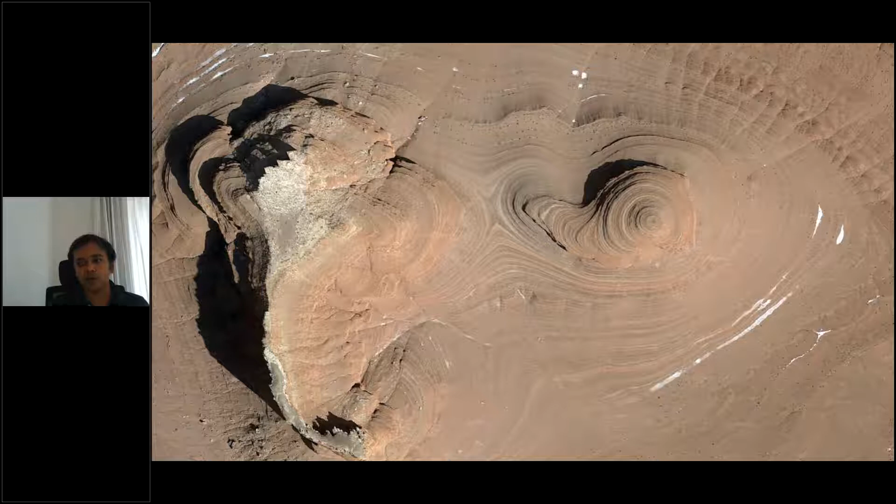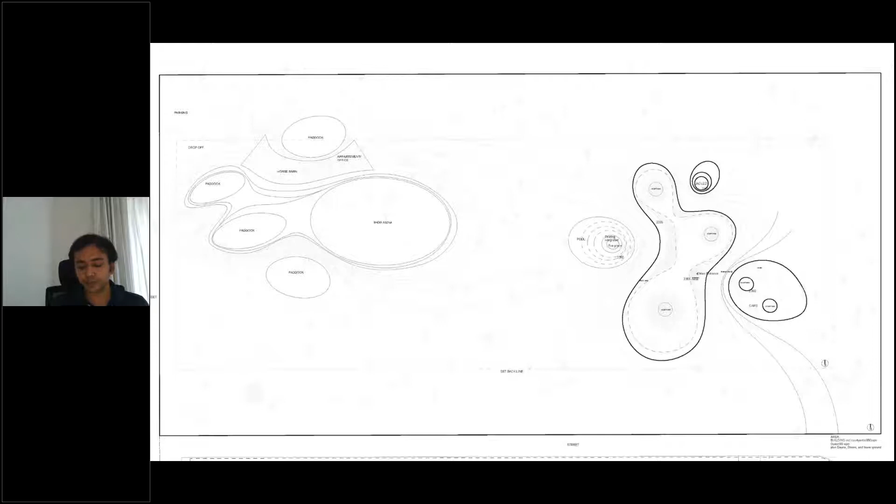So what we did was we took this 5-acre site where the client requirement was only 600 square meters of area, which is on the right, and on the left, it's a show arena for horses.

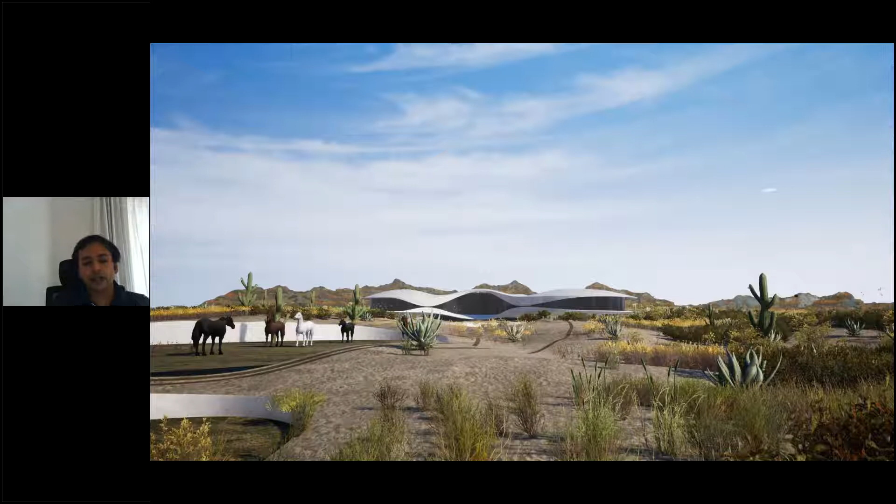In this case, the evening sun comes in, the winter sun comes in, but the peak summer sun is cut by the form and the facade. So when we speak about integration of facade systems with the surroundings, here the built form sits in symbiosis with the surrounding, and it also opens and closes. This is done for structural purposes, and also it closes up at times to create spaces which require more privacy.

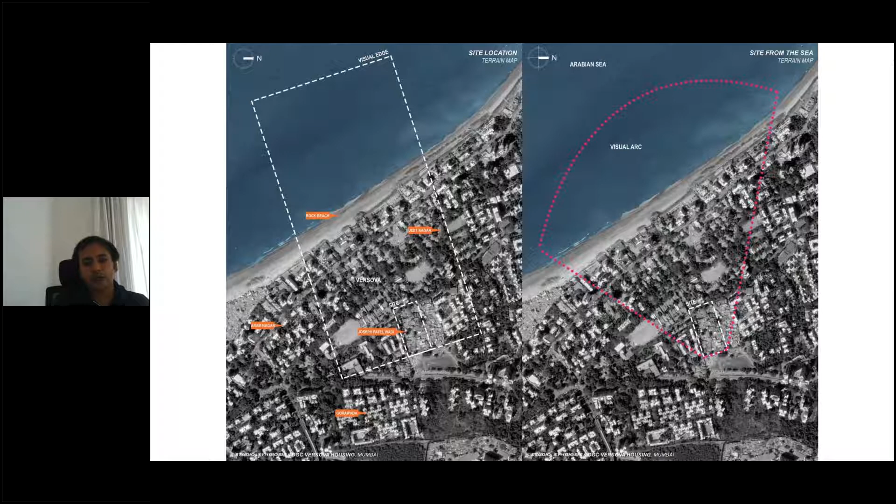The second project is a tower housing project we are doing in Versova. Here the site itself is 4 acres. The beautiful thing about the site is the view which we are getting from it.

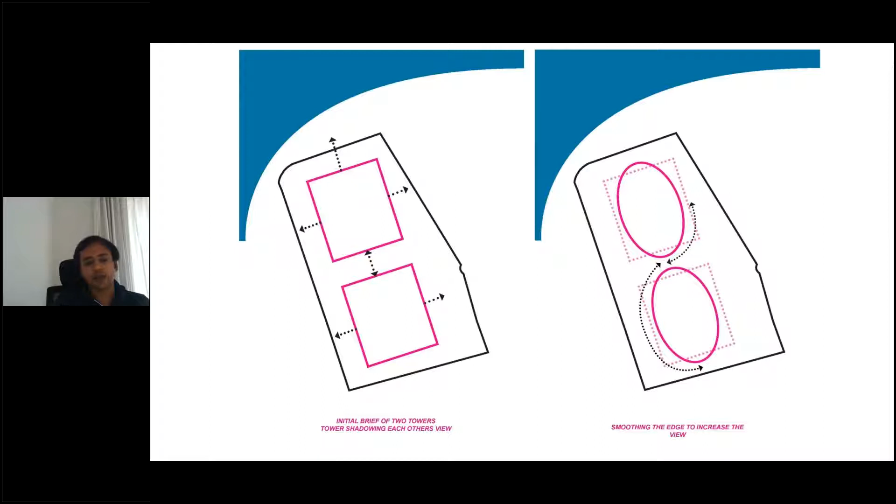The client brief was very interesting. He wanted 2 different towers on the site, which created a bit of an issue for us because the second tower was actually hiding the first one. So what we started doing was creating this elliptical form, and by rotating it, we did a lot of iterations of how we can get maximum view and full view from each apartment in the tower.

This evolution diagram shows how we start doing it. Of course, the lower 5 floors are the podium for the parking, and on the upper floors, we start creating this dancing tower.

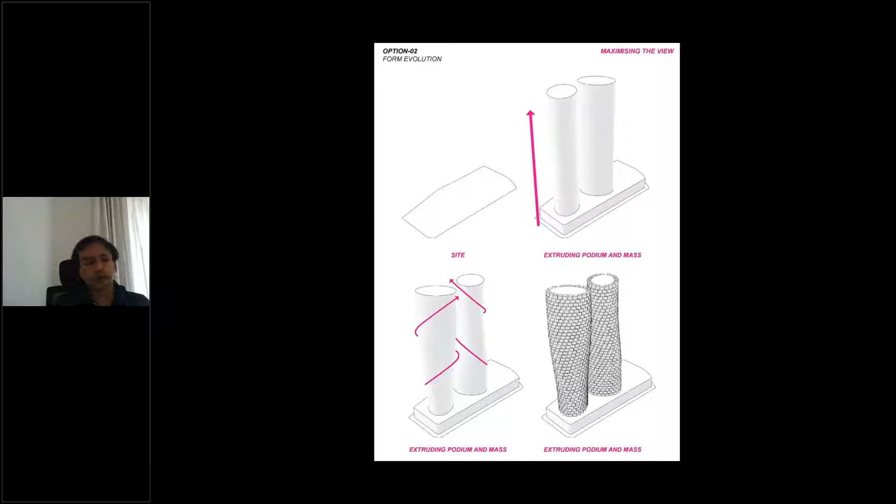In reality, what happens is the facade opens up towards the water. So what you see in this image is all glass, and then it starts closing up. If I showed you the other side view, this would be completely closed, where the core is also sitting. By using this system, we could create a design whereby the facade is completely open towards the view we need, and it starts closing on the other side.

It also gives us apartment-to-apartment privacy, but also from within the apartment we have very nice views of the water. So again, in this case, the design is a direct response to the immediate surrounding in terms of the views we're getting from the apartment and from the tower.

Although you can say the facade itself is not very extravagant, the form and the function actually come together to create this design, whereby the entire thing comes together as one, and you cannot really distinguish which part of the built form is facade, which is architecture, and which is structure.

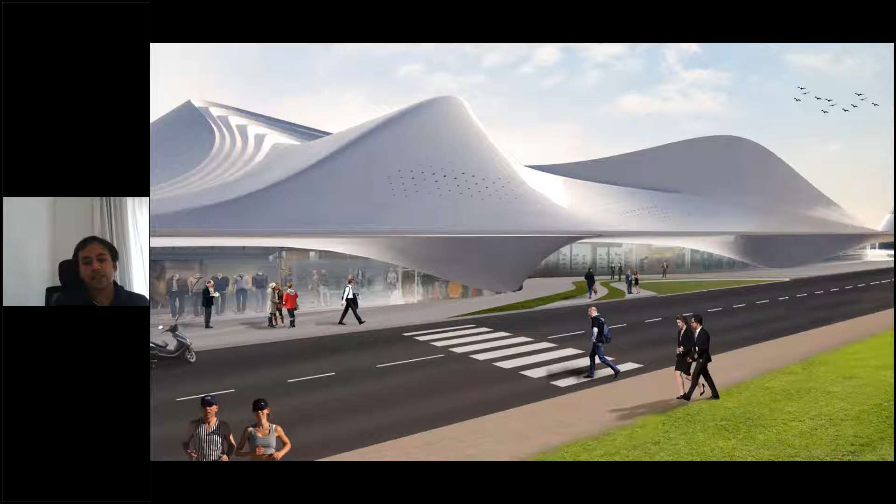This is a very interesting project for us. It's an 18-acre riverfront development in Pune. The client brief was to create a very iconic undulating surface for a shopping experience and commercial experience.

The entire site actually falls in the high flood line, this front part of it. The idea for us was to take this erosion principle from nature, because the site itself is eroded over years, it's flooded every year, and the water recedes back. Looking at these erosion principles from nature, we started looking at this undulating form.

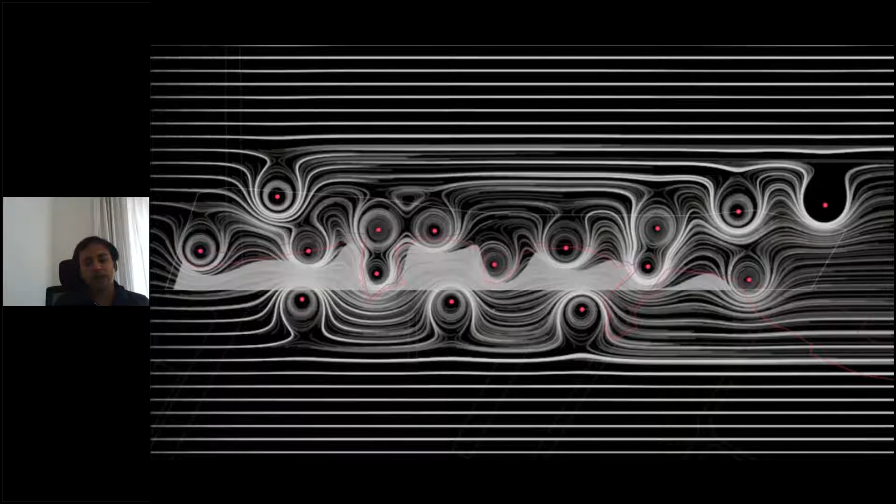To start the design itself, we first plotted the high flood line and the low flood line on the site, and then attractor points were plotted on the site to create this undulating grid. This erosion principle actually guides the entire design, the build and the landscape, and also the facade system.

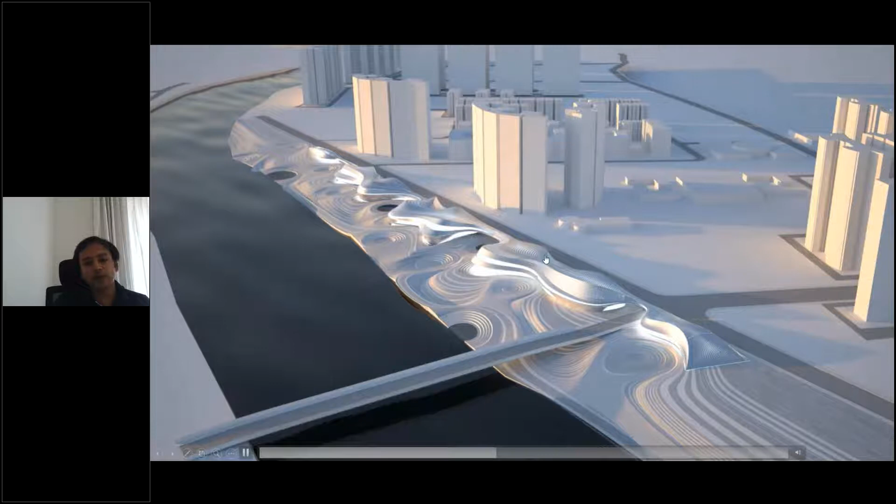For us, the play of light and shadow is very critical in design. By doing these undulating surfaces, we were getting very nice shadow conditions. And of course, the facade opens up.

Being a shopping mall, we could really sculpt the building a lot. We could create closed spaces on the lower floor, where not a lot of light condition was required in certain areas. So we really saw it as a sculpted form, whereby we can create these perforations on the upper floors and close the form on the lower area.

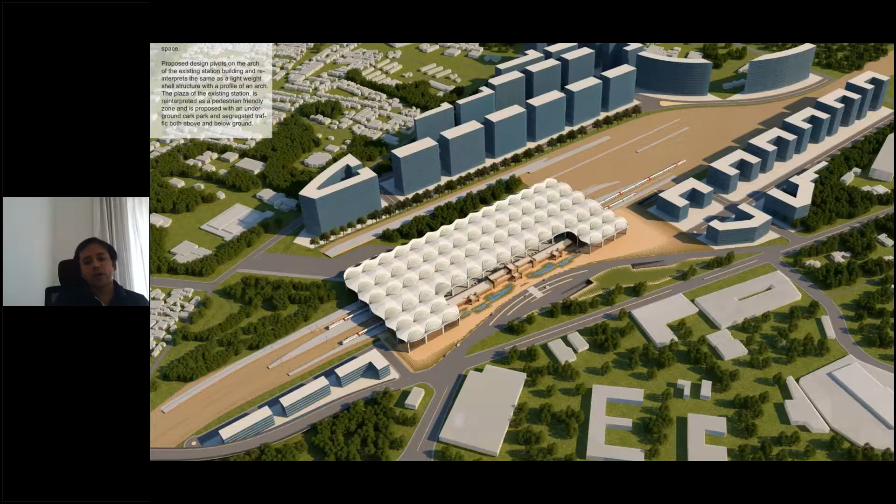Now coming on to the next one, this is a central train station for Gwalior. About 1.5 years ago, we won two international design competitions for Gwalior train station and Baiyappanahalli train station. For us it was very interesting when we started the design, because in a design competition at times you can get trapped thinking about what the jury is thinking.

But we thought, let's do what we think is the best and just forget about everything else. So for us it was not just creating a space or architecture, it was creating social space. The site is located central to the historic city and the new city, and for us it was really connecting the two and creating a social space in the center where the entire city comes together.

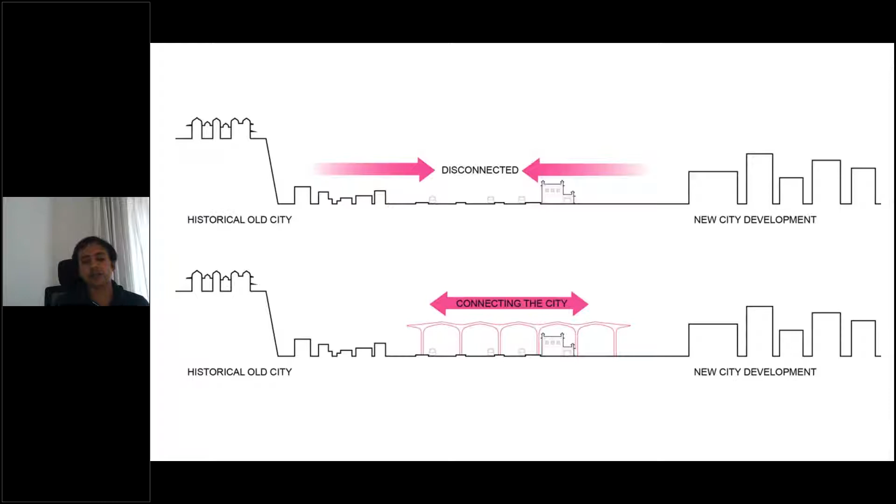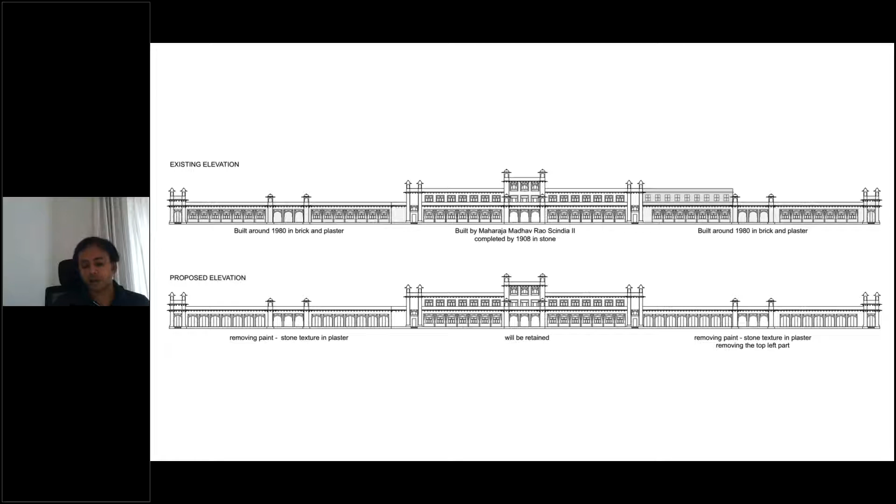In terms of the design evolution, the heart of the project is this existing train station. Although it's not a listed building by UNESCO, it's a heritage building. So for us the idea was to retain the existing building and weave our design along with it. These are the existing arches on the built form, and an arch actually is a very good system of structure. It's not just about architecture, but also about structure for us in a train station.

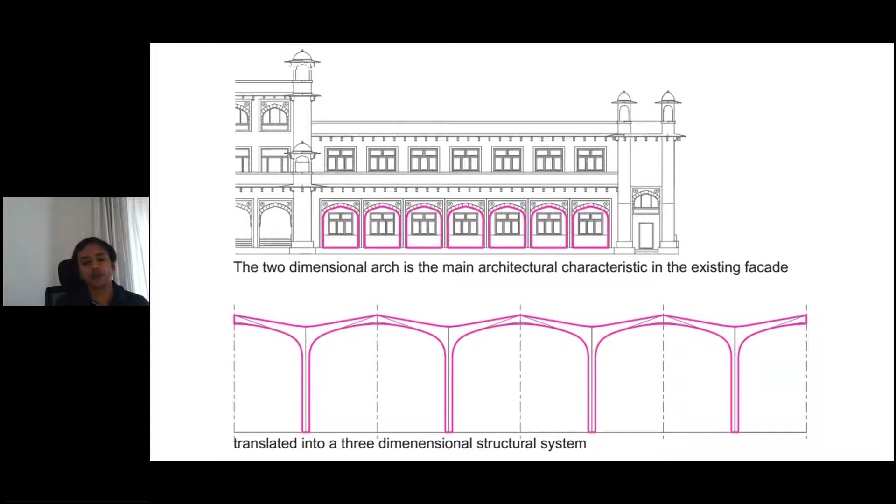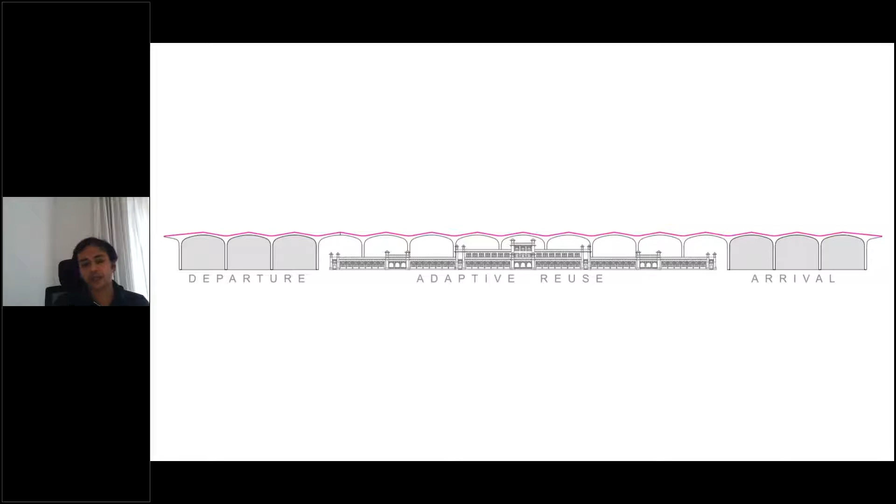So we extrapolated these arches and transformed this into a 3D model. In a train station, the scale is very important because the platform sizing at times needs a 32-meter spacing column to column. By doing this domical structure, it gave us the possibility of creating a system whereby the roof itself becomes a module, incorporating the columns also. This one module is repeated based on the allowed spacing.

This train station is an existing train station, so the platforms are predefined, and we could not even reduce the platform sizes. The largest span we're getting is 32 meters. So in this case, if you ask me which part is facade and which is architecture, it's very difficult. It's one comprehensive system whereby the form, function, structure, facade, and services all integrate in one.

Also, although we have given huge glass panels at the entrances, we also have deep cantilevers, and high performance glass is proposed here. The idea is that when a person is coming, it gives a very nice welcoming gesture to the visitor.

Some people say that glass is bad. Glass is bad if you use it not in the right way and you don't think about how you're using it. As long as you are systematic and conscious in terms of how you use it, and you do solar simulation, this can actually give you a very good opportunity in terms of openness of the design.

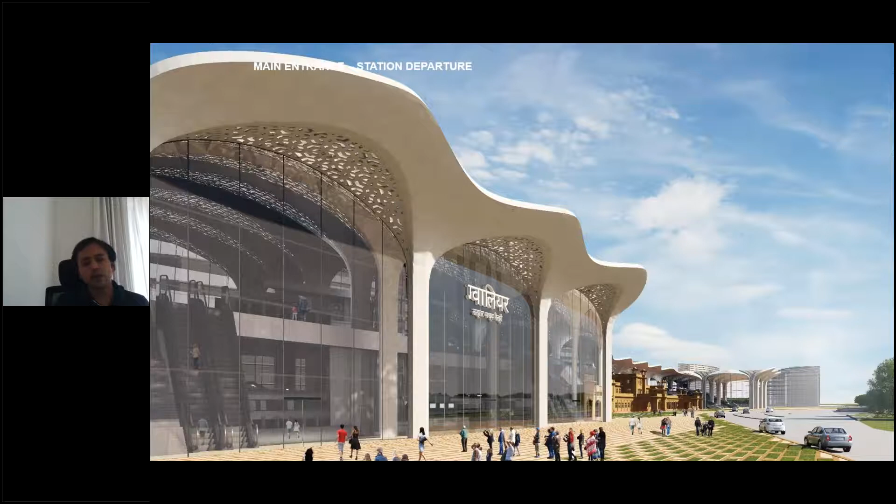In terms of the roof, we also tried to play with a pattern of light and shadow. It's something which is very easy to animate because the sun is moving throughout the day, so the shadow patterns on the floor will also animate.

Different systems are used inside and outside. Outside we're using GRC, and inside we're using FRP and GRG. The reason being that we are looking at a watertight facade, and also the loading of the facade and the costing. So all these three things, we try to create a balance in terms of how we create the system itself.

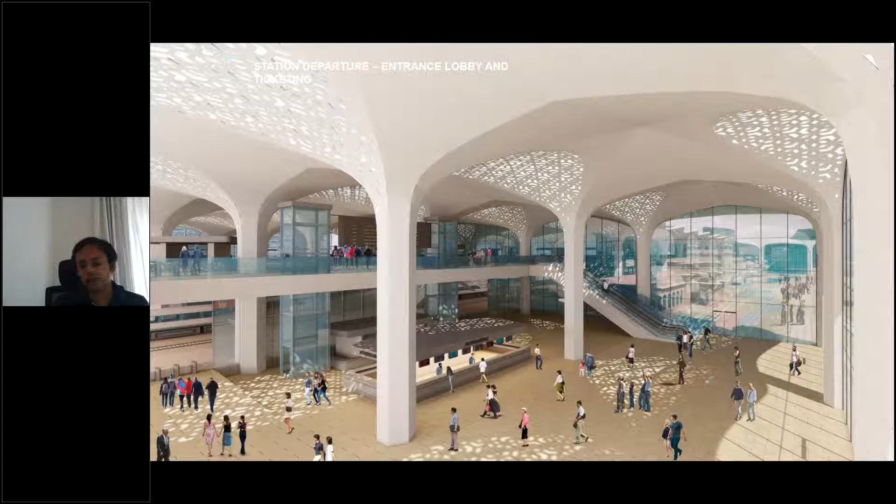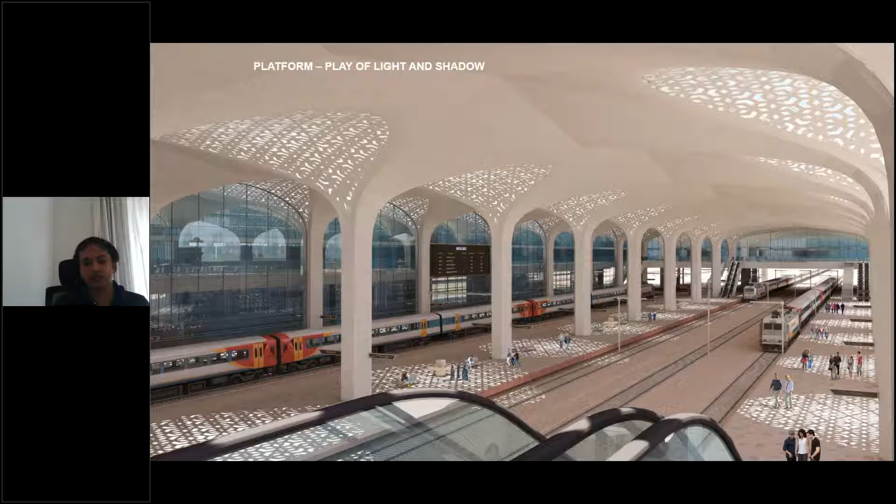Now the second topic of this particular presentation is how facade can be integrated with design itself.

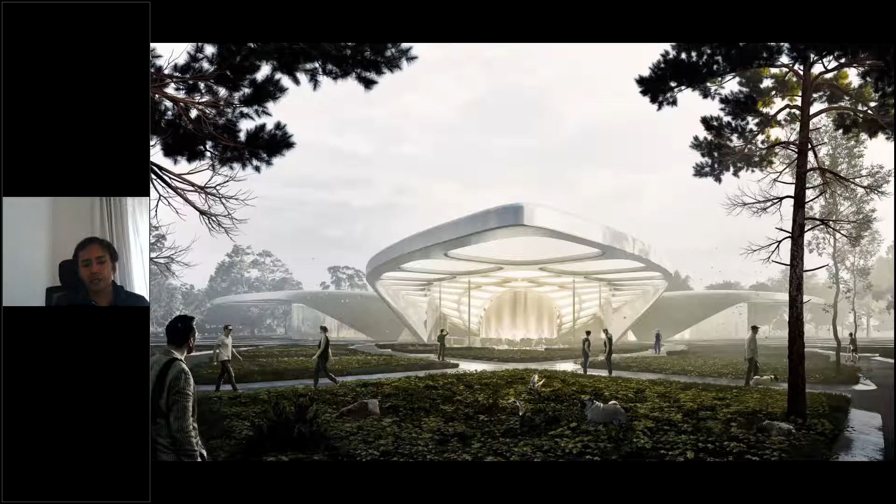So this project is Perfume Park and Museum, an 80-acre project in Kannauj. The design brief is based on the fact that Kannauj and Grasse in France have a Twin City agreement to create a skill development center in Kannauj, whereby there will be a distillery and they'll be showcasing the existing attar of Kannauj in the museum at the heart of the complex.

So for us, if it's a perfume park and museum, we did not want to go very literal and create another lotus temple. We started looking very closely in terms of what it means to be a flower. So the center of a flower, in this case a sunflower, it actually radiates out, and the base system is a Fibonacci series. So it is based on golden ratio and it's an exponentially growing grid. So this grid was analyzed and developed.

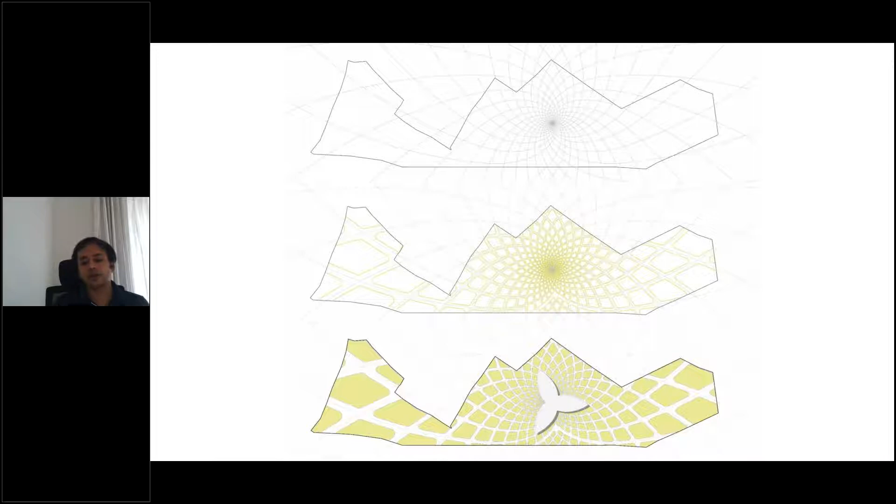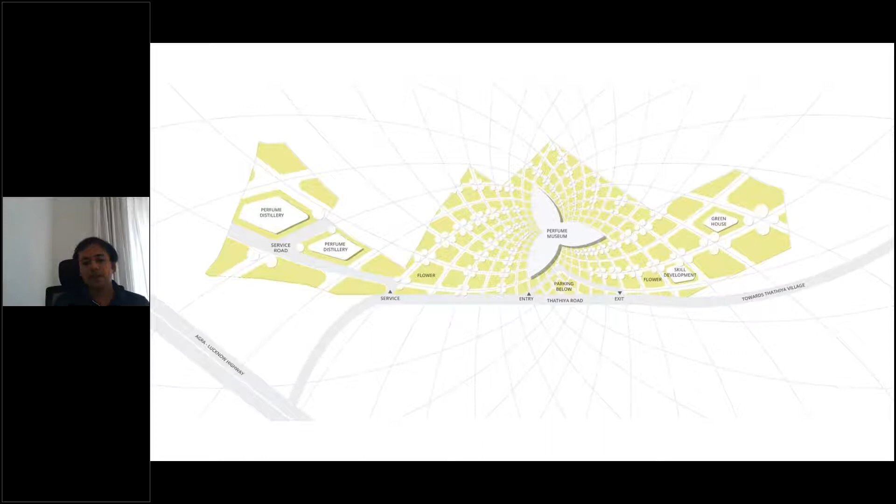In terms of unifying the facade system with the design, the reason I want to show this project is that the entire thing comes from this one base pattern. This base pattern actually evolves and creates the facade of the system, whereby in this view, the 3 petals which are there come from the base pattern itself, the pattern of a flower. And these 3 petals have 3 distinct functions within.

If you ask me which part is facade and which is function, we have again used deep cantilevers with glass to give us more visibility. It's a low height structure, and of course the scale of a project matters a lot. If we were to design something which is 120 meters, how we treat the facade would be different. But in something which is only ground floor, we can be a bit more experimental and create something more extravagant.

So the pattern of the landscape is projected on the ceiling, which in the outdoor area also creates the lighting system that actually accentuates the inside. So this is how the building sits in terms of the surroundings.

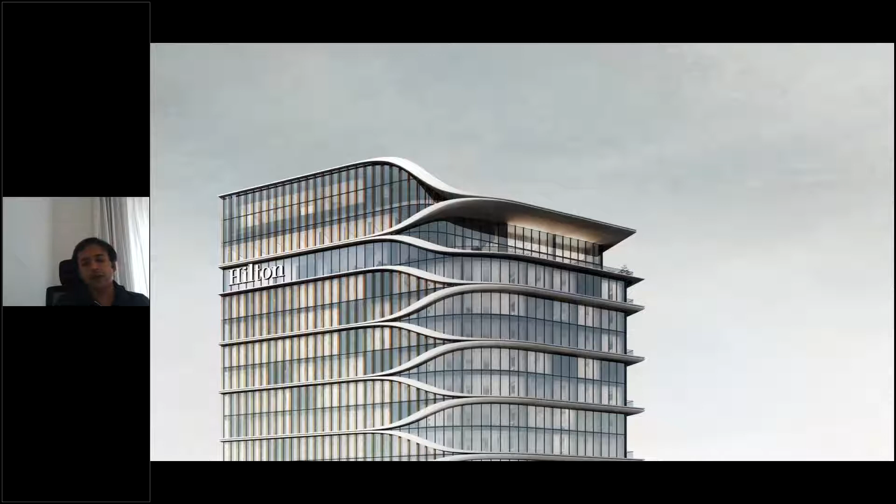So this one was the most difficult project for us. The project is Hilton Kathmandu, in terms of symbiosis with design and in terms of a facade system. We all know hospitality is all about how we can make systems efficient. We cannot do something which is non-standard, and we cannot do something which will be very difficult to execute.

Now the design brief was to create a system where we take something from local culture, the culture of Kathmandu. This created a very big problem for us as a practice, because we are usually into contemporary architecture and we're always trying to investigate new systems. So using wood or old carvings was not something we were really interested in. For us, it's very important that we are excited about the project going forward.

So the end solution was actually the prayer flags of Kathmandu. Instead of looking at the architecture of Kathmandu, we started looking at the prayer flag. It's one element which is in the entire surroundings of the city. It's there, but it's not there. So we use this very colorful flag, which creates a sense of aura in the space it's in, and we transform them into this vertical dichroic panel on the facade, which actually creates this sense of prayer flags of Kathmandu into the architecture.

So the building is opened up on the right side to the views of the city, and on the left, these magenta panels are the dichroic panels. So by doing this, we create dichotomy. We are not really wrapping this all around. We also want to have views opening up.

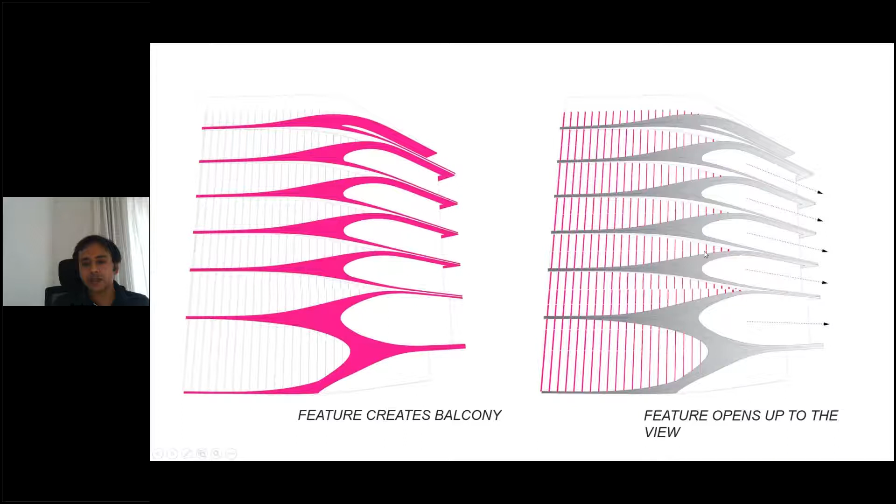And the facade actually becomes these balconies, on every alternate floor. On the left side, it stops the pattern from running around the entire building. So in a way, we try to create this dichotomy, and also when you're moving around the facade, it creates different perspectives. From the left side, you'll see something else, and from the right side, you will see something else.

On the upper floors, we push the system back. The entire thing is single curved glass, so optimizations were done, and we have a glass wastage of only 2.5% right now in the entire building. The bands themselves are made of GRC, whereby the mullions are actually being reinforced. The biggest problem for us with GRC is the weight, but the plus point is that it's a very long-lasting material. So instead of puncturing the slab and going through the spandrel panel, we created a system whereby we strengthen the mullion and can have GRC directly there.

The next one is really where the facade takes a bit of a backdrop and the nature takes the foreground. So the green part of the entire design is actually what creates the facade system.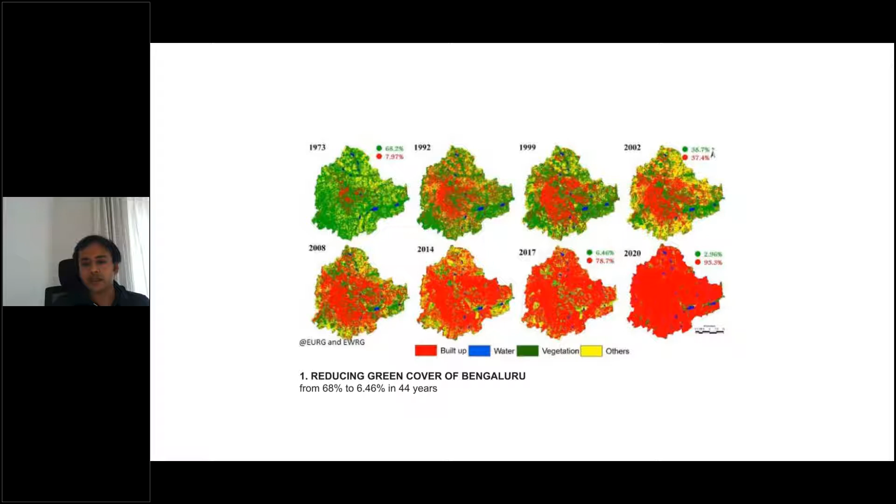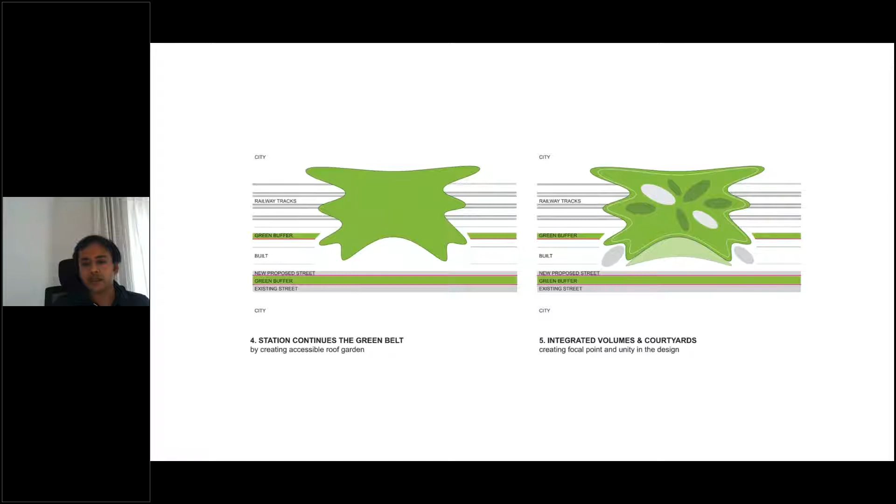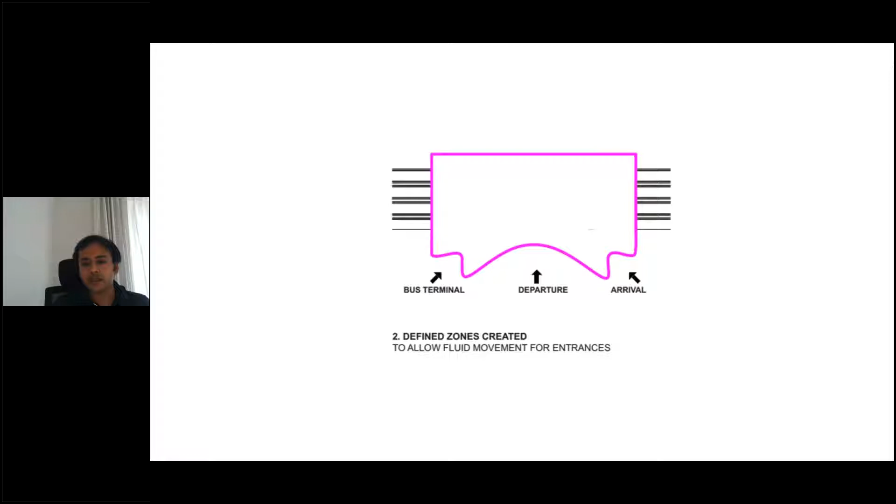So we use this garden city concept and unroll it, creating a system of design whereby all the elements are flowing, creating maximum surface area on the facade. In a station building, it's very important to create multiple entry points, otherwise it's very difficult to control how people are coming in and going out.

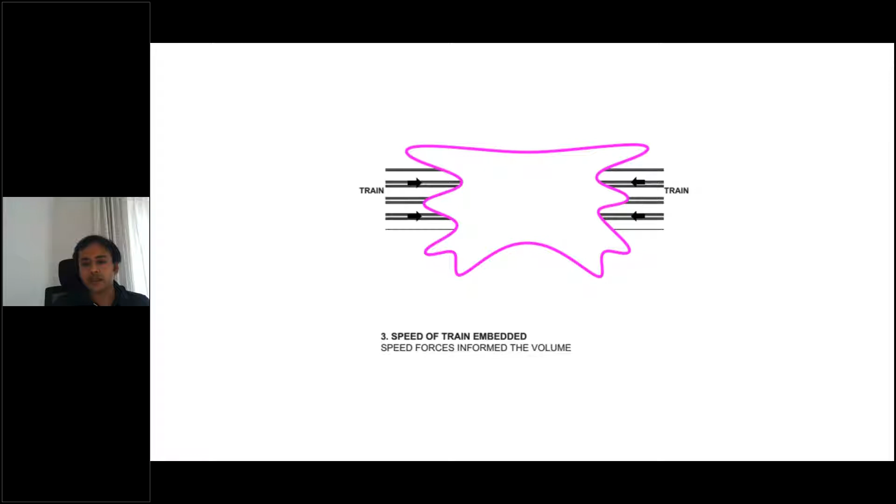Furthermore, the form responded to the trains which are coming on either side, giving us this form. Since Bangalore has a depleting green cover, we transform the architecture and the facade of the space into this green facade.

The roofscape - thankfully in Bangalore the temperature is very ambient, so we can use outdoor spaces as a chill-out space for people moving around. There's also a long halt in terms of a train station, so people waiting for trains can come to the roof and use it as a chill-out space.

Furthermore, these iconic buildings placed around the station serve two purposes. One is to expand the station so we get more areas for it, but they also act as iconic buildings from a distance - a visual marker. The station itself is low height, but these buildings give a visual marker when someone is traveling.

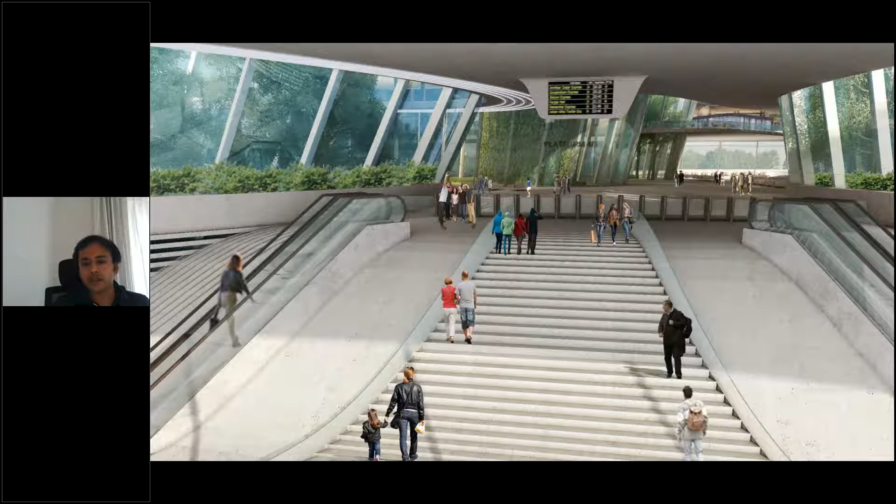These are just some views where the facade actually extends in. The courtyards are punctured in the form, and this entire garden city concept of the surroundings is brought inside the building itself.

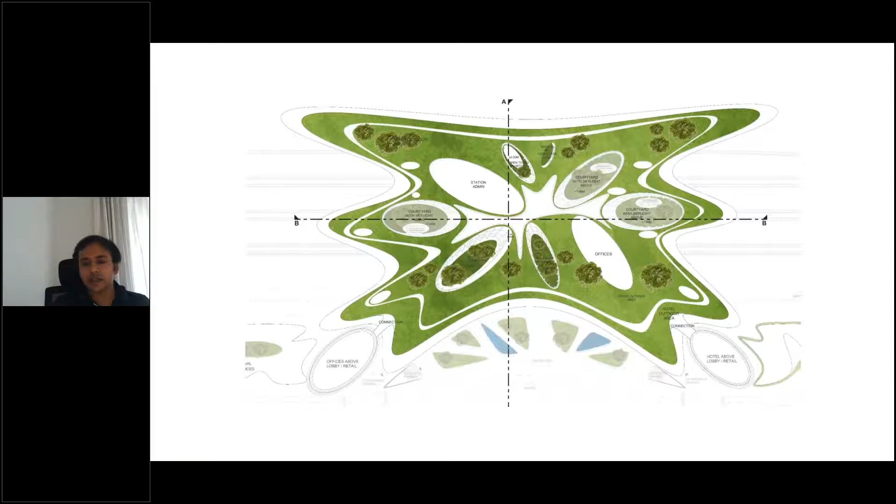Of course, structure is very critical in every case in a project like this, because you have to make sure that wherever there's movement happening, you're not obstructing the movement.

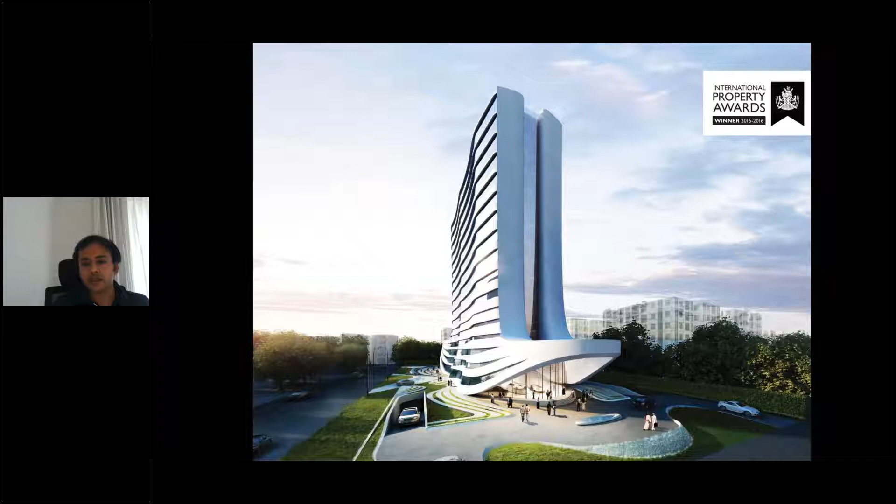This is a project which we finished last December. It has been operational for 1.5 years - it's DoubleTree Hilton Ahmedabad. Here the idea for us was to create a building which becomes a welcoming gesture for the visitor, and also the landscape and the built form integrate with each other.

So in terms of design, the entire form facade system comes together where the landscape ripples onto the facade and creates this built form.

Now, iterative design. In terms of iterative design, we have all these computational tools and techniques which are available to us, and for us it's very important to use this in design.

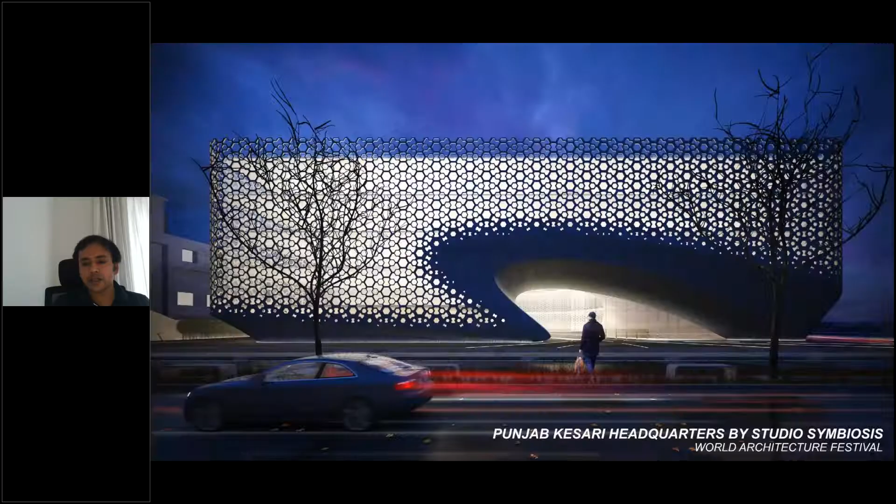This is an older project from the office - I think 6 years old. But it's still very important for us because this was the first project where we started using tools to reduce solar heat gain. Through simulation systems, we reduced the heat gain of the building by 42%, where all the efficiency ratios were checked and an iterative loop was generated.

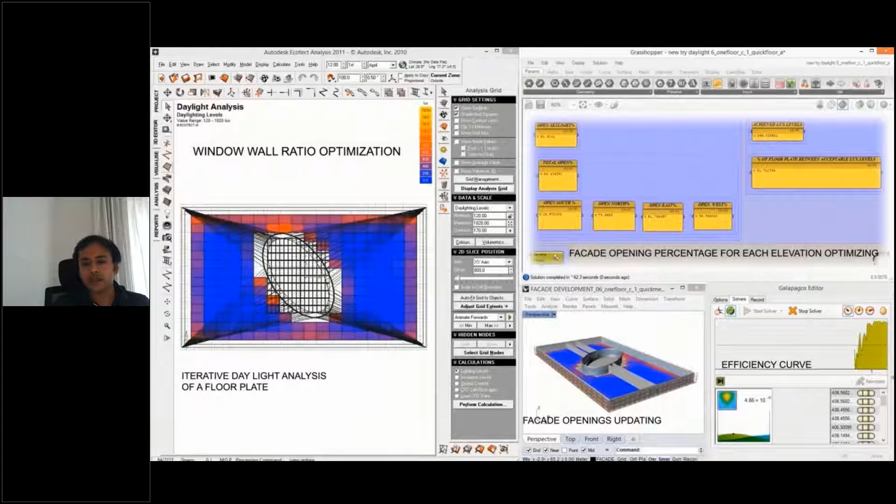I don't know if you can see, but the opening ratios of all 4 facades are being calculated in real time, which gave us the actual ratio we should follow to create this optimized and robust design.

Going forward, we tried to use patterns of India. We did not want to create something alien to the city. It was a conscious choice that the form and floor spaces are very contemporary, but the facade is a bit more traditional in nature.

So we took this system of overlapping hexagons - 3 hexagons which overlap - and by changing the ratio of the scaling pattern, we created various opacity ratios on the different facades of the building.

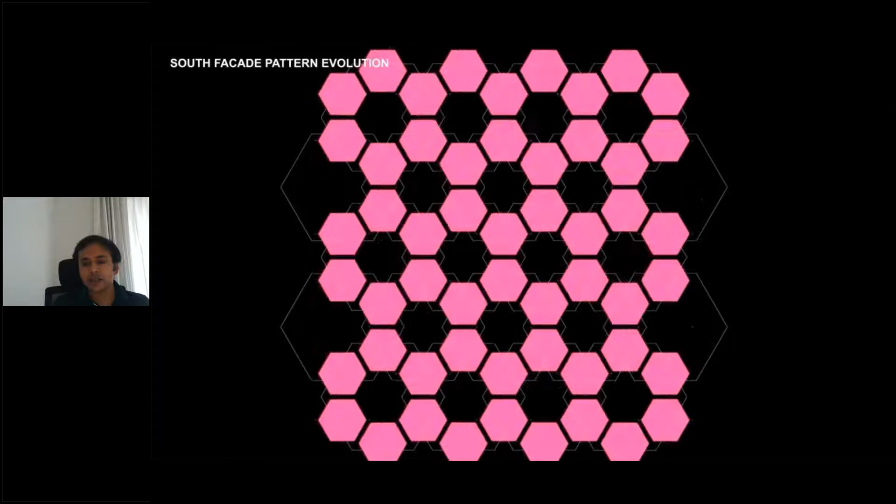So here the facade generously opens up on the ground floor and lets people in. This is the facade ratio study which we generated.

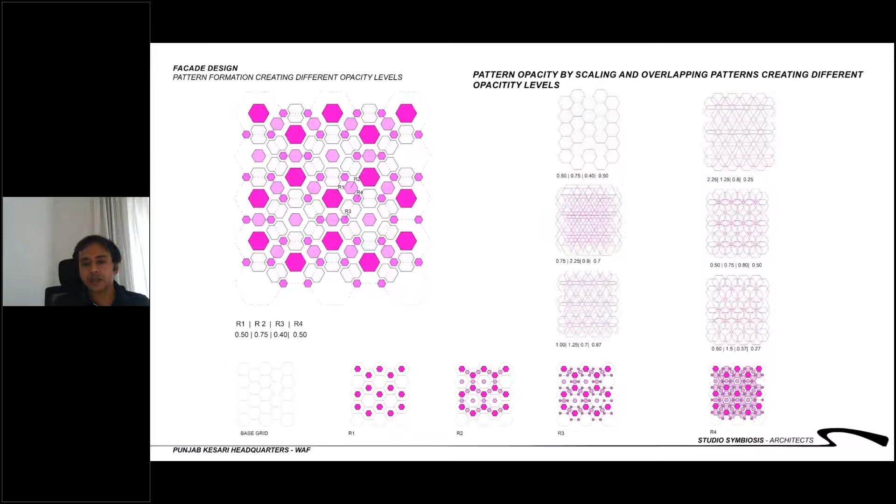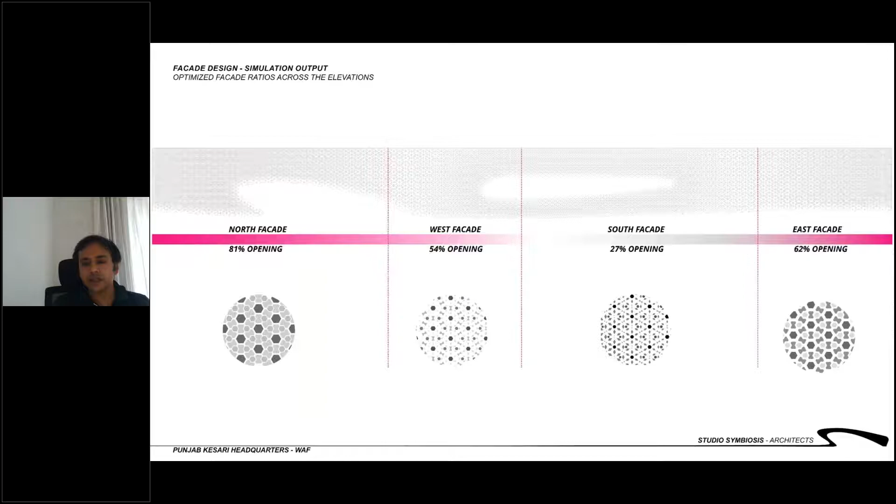Now for us, this project is again very critical in terms of execution. The pattern is such that we cannot run any horizontal or vertical member. So the final detailing we have done is that we are hanging the panels from floor to floor. Initially the material was GRC. So we were also trying to look at how to optimize the system to create a symphony between how the design should be and what the material can allow us to do. Here you can see clearly that there's no way we can run any member vertical or horizontal without it showing on the outside.

So we took the form, the requirement of the client, and we stuck the water body inside, which is the swimming pool. Based on the sun direction and the design intent, we created this amalgamation of the built and the landscape. So here the built and landscape become as one.

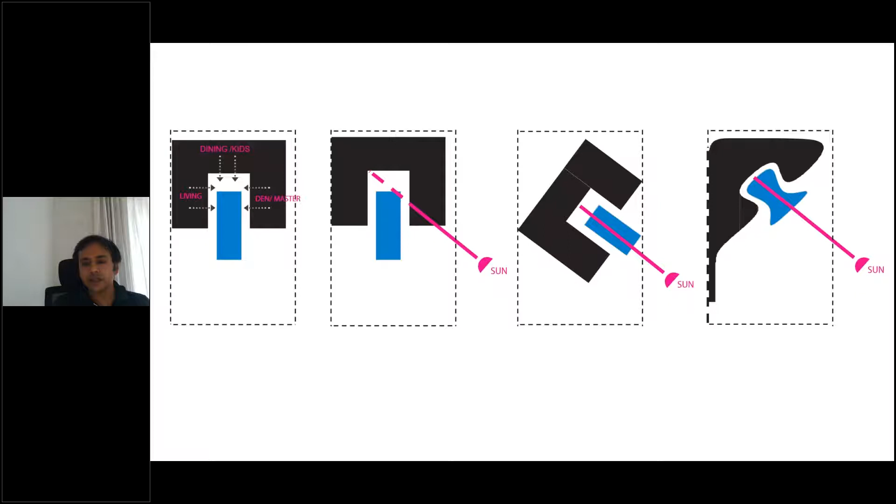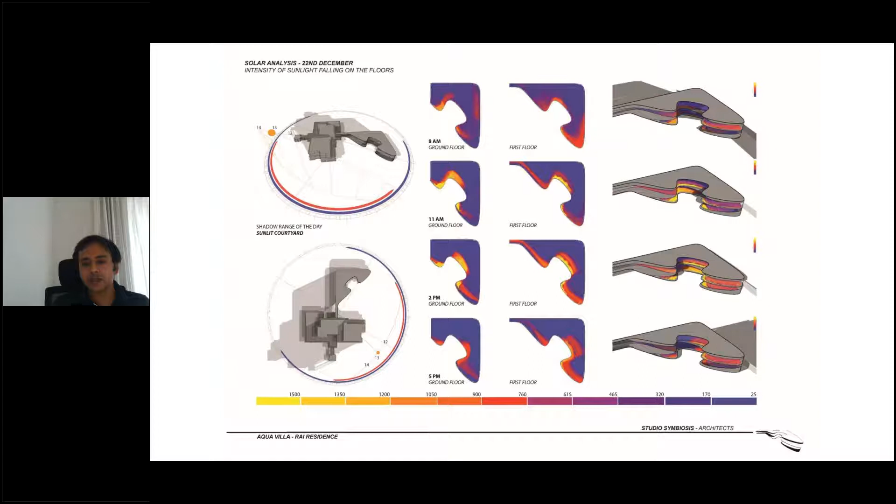Solar studies were done to see, in terms of iterative design, how we can cut down the summer sun and let the winter sun in. This is something we usually do for most of the projects. In this one, you can see the winter sun is actually letting through. Also, being a residential project, we had this requirement of hiding spaces behind because privacy is required. So we could use this facade very nicely to come in and hide the spaces which require more privacy.

Although a lot of back-end iterative design is being done, also for this Hilton Ahmedabad and other projects, the thing is not really about showing the process, it's all about the final product. So Ahad, I think I'm on time. This is it from my side, handing you back.

Hello. Yeah, Amit, I'll take over from Ahad's side. I think, yes, we are very much on time. So far, so good. And thank you very much for a wonderful presentation.

I'd like to take the subject forward. By chance, I am the next speaker and the presenter. I am going to talk something different with all of you today who are present. I'm going to take the subject and digress a little bit into an aspect of not religion, but to do things right. So let me change my... Sorry, Amit, what are you saying? No, nothing, I said I just have to change myself to presenter, and that's what I'm doing.

Thank you very much, Amit. Ladies and gentlemen, good evening once again. I'm just going to run through a few of my slides which I've prepared today to maybe get into another perspective going from what's happening today. So today I'm going to be talking about a subject called let's do things right, and let's always do right things.

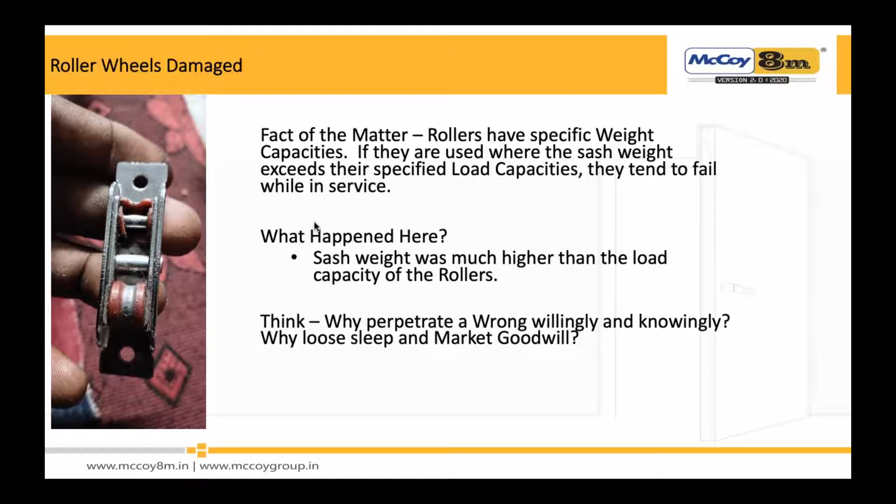The point is not that the roller was faulty. The point is it was not meant for this application.

And I think a lot of people do this, thinking it'll work out, it'll get done, it'll look fine. I think it's all about a change of attitude.

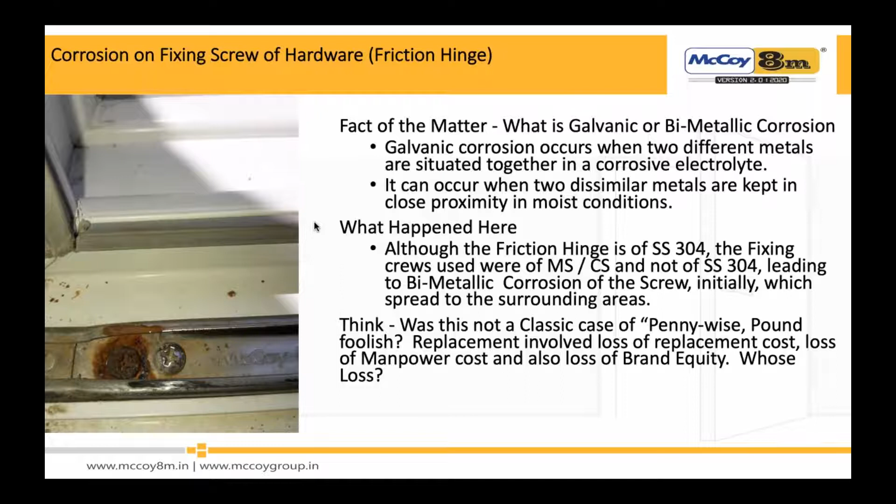Now why was this done? Many reasons are possible - the supplier of hardware, even ourselves, didn't have the product, or the guy wanted to do it in a hurry, or something was cheaper than the other. Let's not get into that part of the story. The part of the story here is to do the right thing. And the right thing is always the right thing, and the wrong things are plenty.

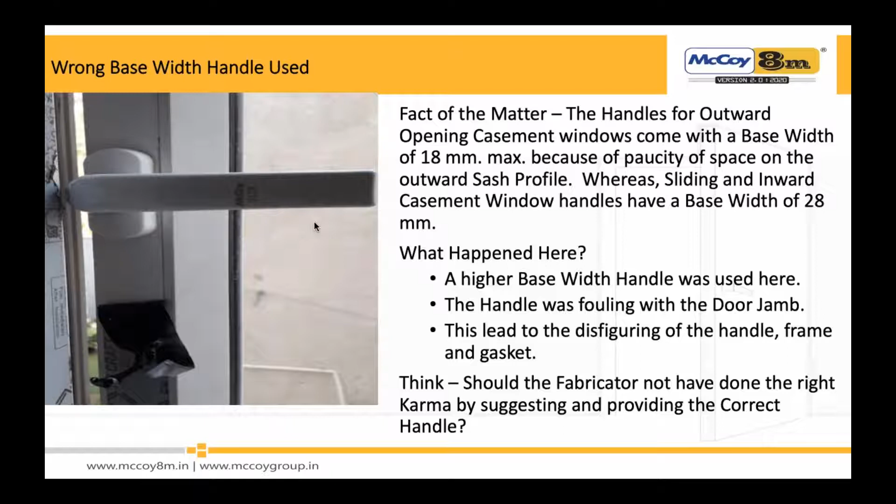What if it's a little child looking out, or there's a dog, or somebody can just jump out? I do remember 10 years ago there was a huge project of maybe 50-60 stories, and I don't want to take any names. There were windows outward opening at 7 feet high, or doors outward opening. Look at the wind speed in Bombay, and they were outward opening.

So I did ask the client at that time, why are you using this? They said it's because India is very used to outward opening. I don't think that's the right answer, that India is capable, man. Look at today's situation of how our country is managing this crisis.

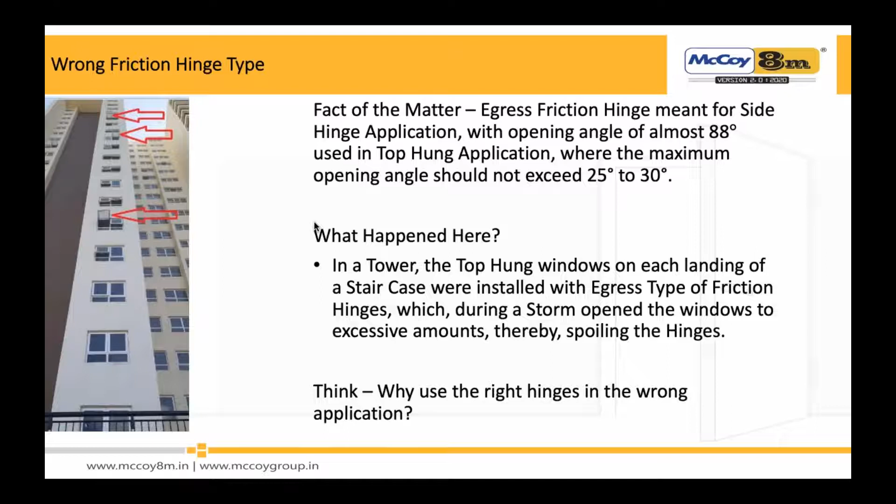The reason I showed you this video was just to demonstrate that we should be able to sell or install products where it's not a fight of muscle. The poor customer paid in full, and somebody compromised—whether it was the developer, the architect, the fabricator, or all of them together. But that's not the point here.

His compromise was either a known compromise or an unknown compromise. I think the focus for the consumer, the fabricator, the manufacturer, the developer, for the whole community, when it comes particularly to doors, windows, and products that you install—and it's very successfully done in the facade business but not so much in the window and door business—is that no compromise is done on functionality.

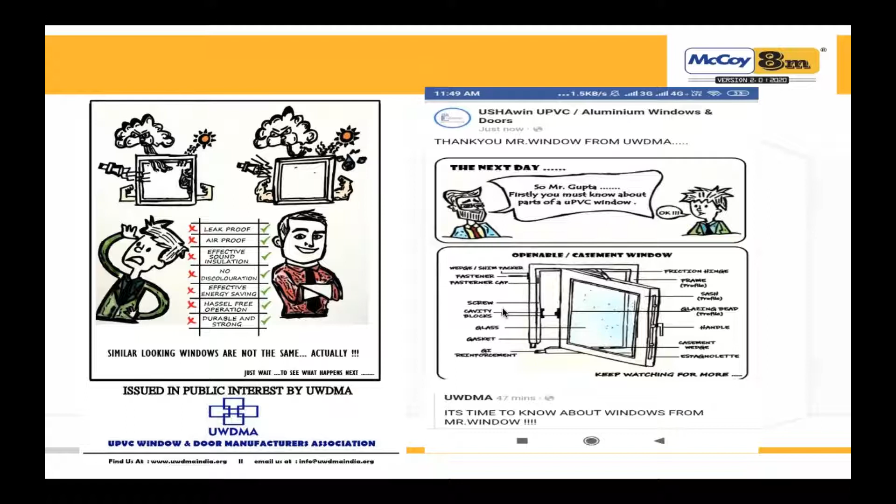My humble request would be to give a little bit more attention to detail on this subject as well—doors and windows, and the typology of the functionality of these doors and windows. So this campaign is on social media, and I guess we're trying to do our part.

Finally, I learned this from across different parts of the world that I'm part of. In today's times, it's not a message, it's just my personal feeling: be brutally honest with your employees, with your teams, with your customers. Please present today's rationale for hope. Whatever your reasons for survival and how you will survive, be a very positive rationale.

Please, my request, don't waste your time on useless social media. Kindly follow what Modi ji says and respect staying at home, respect the fact that we have to maintain social distancing. This COVID is not going away so soon. We'll have to know that this is a 3 to 6 month phenomenon. Really, thanks to all our healthcare, police, administration, government.

One thing I've learned is, McCoy and my team, we are in touch with all our customers, suppliers. We are also doing a lot of webinars. Keep in touch with all your customers, your community. Read, learn, attend as many seminars. And of course, enjoy the family time, which is very, very important.

The topics that I would be covering today are silicone sealant, acrylic sealant, uses of acrylic, functions of a window, issues with window installation, what is PU foam, application, and a foam calculator.

So the window has been fabricated and it has been fixed on the cavity of the wall. The last process is to seal the perimeter area with silicone on the exterior and acrylic on the interior. So what is silicone?

Silicone is a viscous paste with a base of polymer and plasticizer and various other ingredients. Once it cures, it becomes a vulcanizing rubber, which stays weatherproof.

It has excellent elasticity, excellent UV resistance, and is stable in all kinds of weather conditions. So this is a silicone sealant which is applied on the exterior.

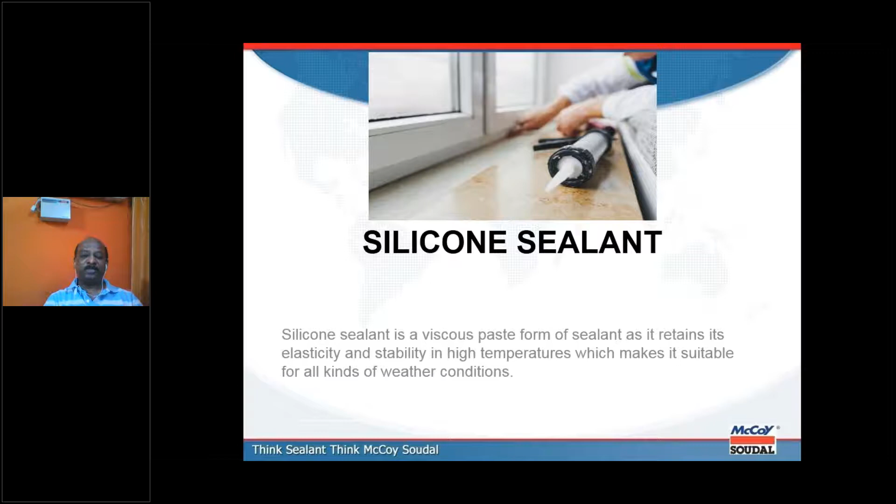And what is an acrylic? It's a plastoelastic gap filler, easy to use, economical sealant, provides excellent adhesion for gaps in low movement. The uses of acrylic are basically in many ways.

It could be used for grouting, jointing, sealing between doors and windows. It's also paintable. It has good flexibility and crack resistance, and has good adhesion on most surfaces.

It gives a very smooth finish, is non-slump, low odor, and non-toxic, and suitable for interior and exterior application. It also has UV resistance.

So what are the functions of a window? A window should allow natural light, number one, natural ventilation, vision, a barrier to rain and dust, heat insulation, sound insulation, and energy efficiency.

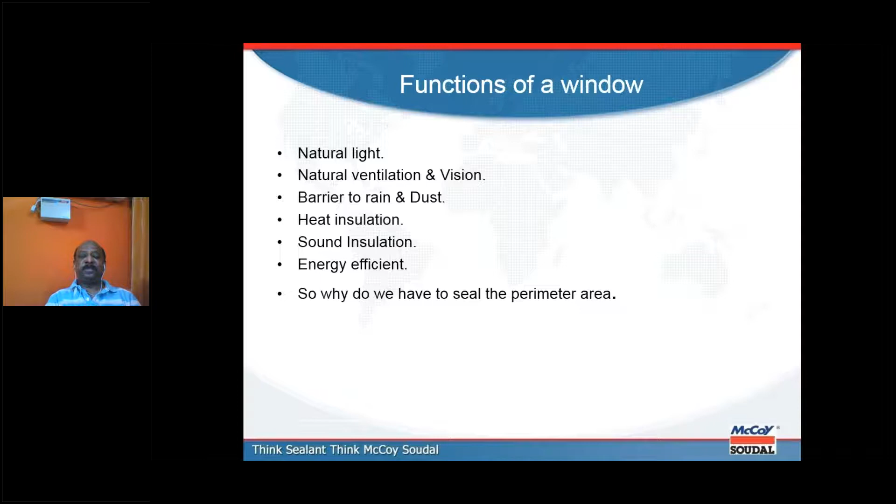So why do we have to seal the perimeter area? What problems could we expect in a window? Of course there are air leaks, water leakages, thermal insulation issues, sound insulation issues, no vapor tightness, and mold formation as well.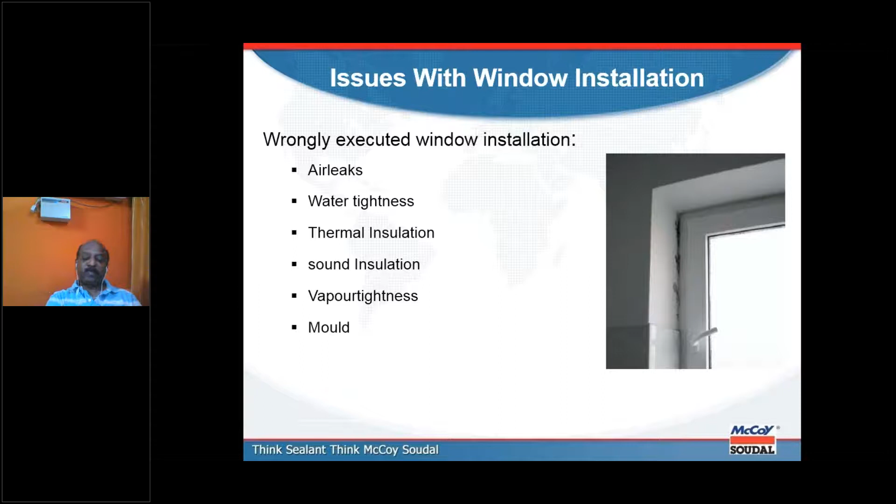So basically, if you seal a window properly, and you have air conditioning or a heater inside the house, sealing or insulating the windows properly gives you good energy savings and saves a lot of money as well.

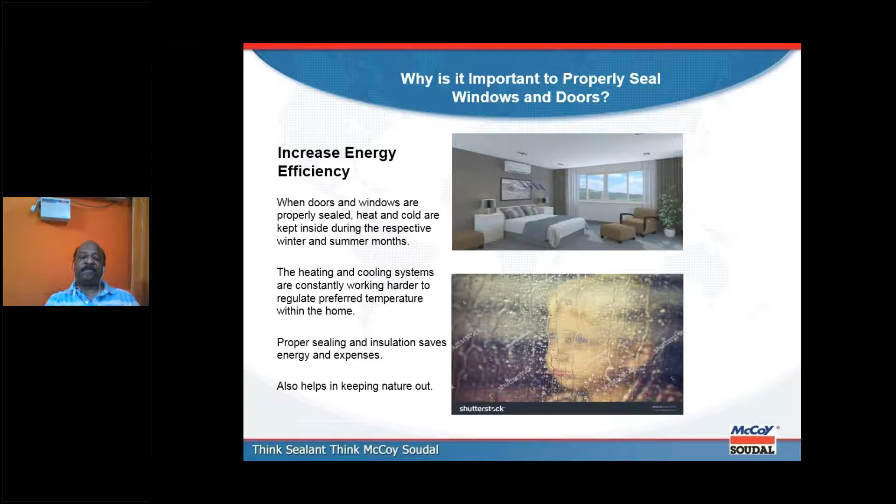It also prevents outside elements like rain, heat, sound, and insects from coming in. So if you don't seal or insulate the windows properly, you will get some kind of mold formation.

If you look at these thermal images, wherever you see blue marks on the window, these are the places where cold air is coming out. And if you have heaters inside, the heat is coming out there as well.

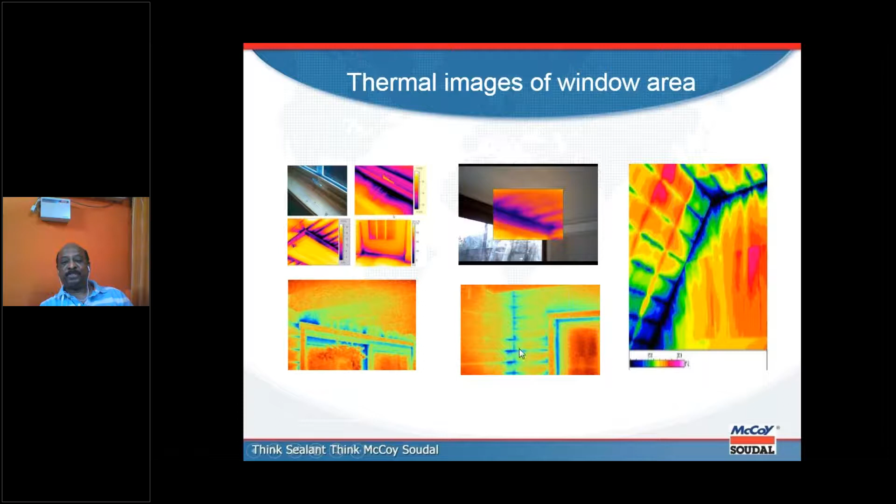And if you look at the thermal bridging images, when you put both images together, these are the areas where the bridging happens.

So it's very important that if there is a leakage in the window perimeter area, your air conditioning or heater starts to take on more load.

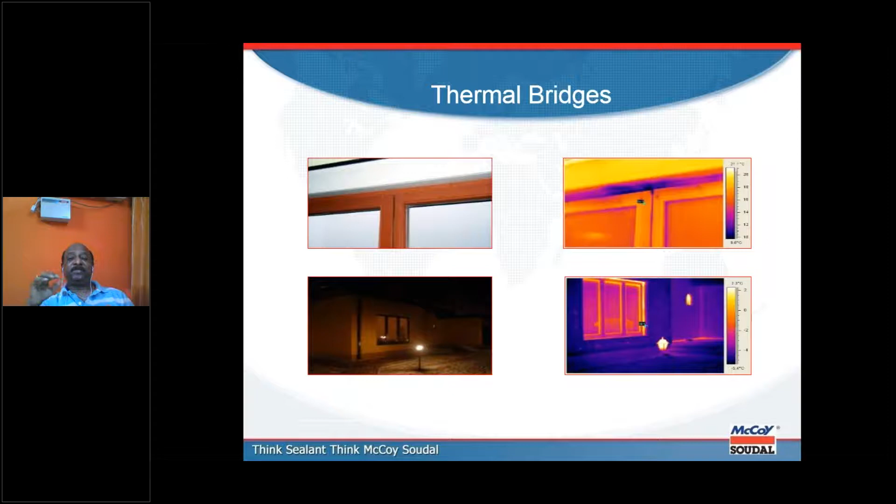That increases the electric power and increases your expenses. So it's very, very important that the window is totally insulated properly.

So what happens if you don't seal them properly? These are some images where you can actually see the mold formation.

This happens only because of moisture content within the house, in the corners of the window, where leakages occur. Usually we put a very small layer of silicone and acrylic inside and outside, probably just 5mm thick, with 5mm depth, and in between there is absolutely nothing. It's hollow, so condensation takes place which migrates out, causing mold formation. This shows the quality of the installation was not done properly. Even though we call a window a complete system because many things are put together to make it, the system has no value if they are not sealed properly.

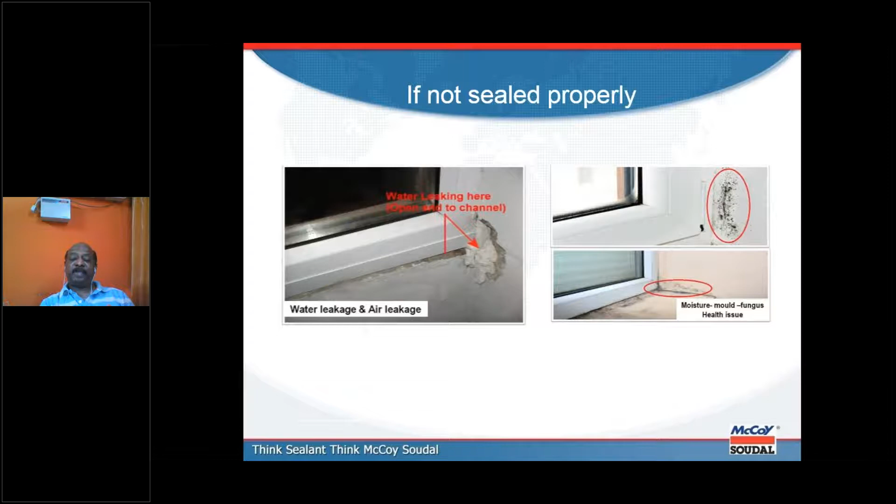So why does this happen? One thing we should not forget is a window cannot be insulated without foam filling the cavity in between. The foam is a self-expanding, one-component polyurethane foam which expands into small cells. It expands like a bubble formation - these are all called cells. The more the cells form, the stronger the structure becomes.

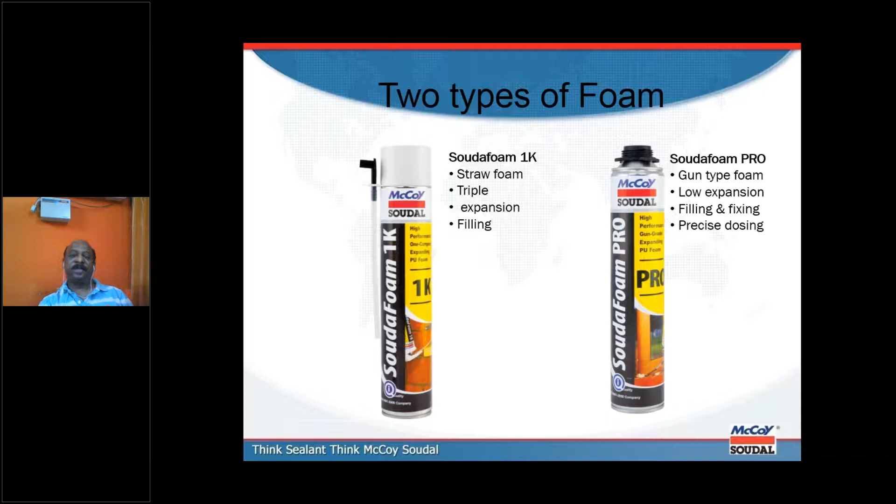So now what happens is once you extrude the foam - there are two types of foam, one is straw grade and one is gun grade. When we extrude the foam inside, the foam actually expands itself.

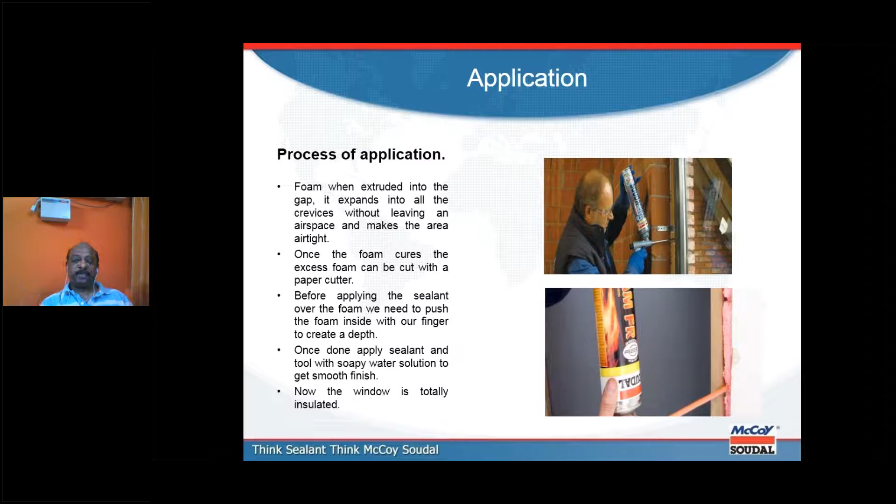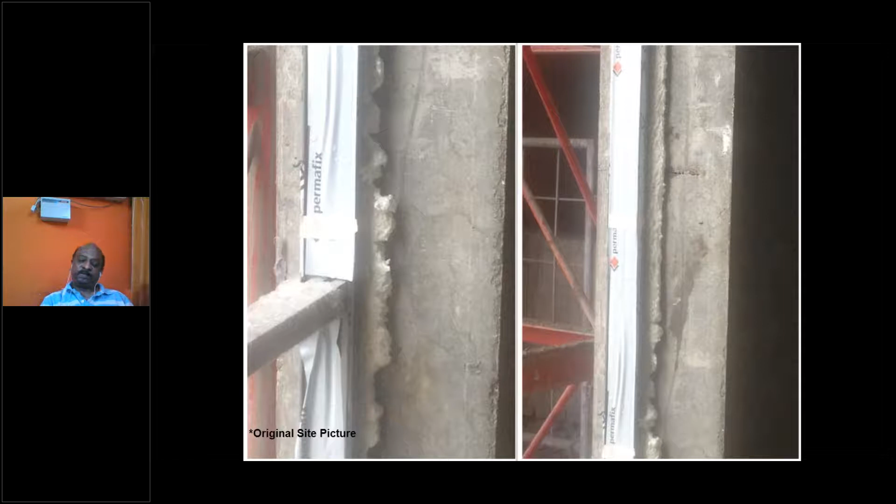After that we do the silicone tooling over it, and after that we also have a foam calculator.

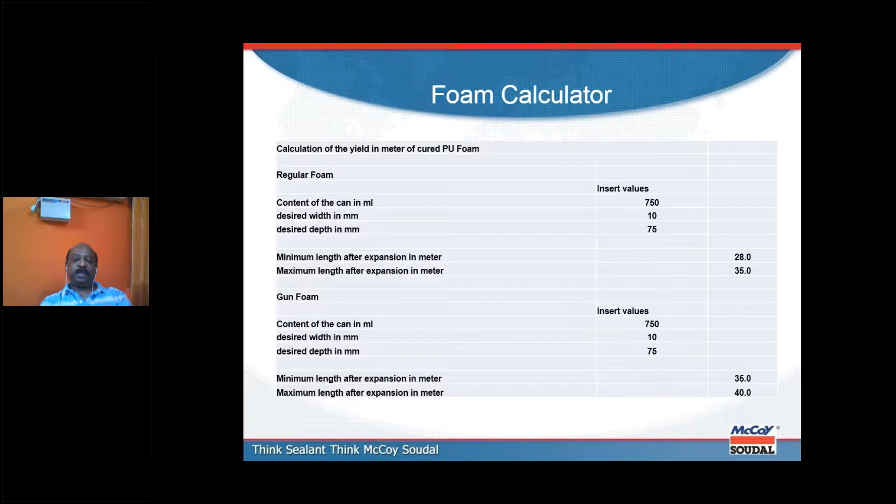At the time of handing over the project to the client, there are certain areas where probably the profiles are all dirty. You could actually use the UPVC cleaner to clean the profile and then hand over the project.

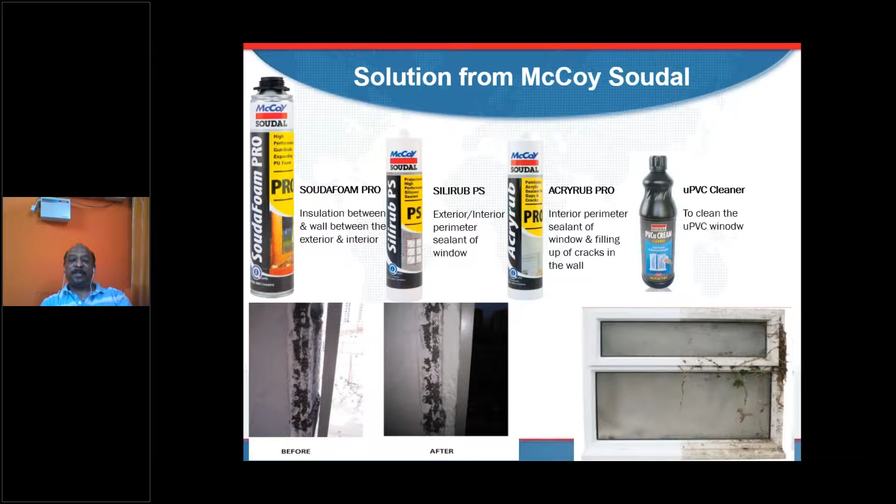To summarize, sealing the perimeter area comes as the last stage of the installation and is equally important to seal and insulate the window with foam, silicone, and acrylic for better foam performance and the complete window system. Thank you for your time and participation.